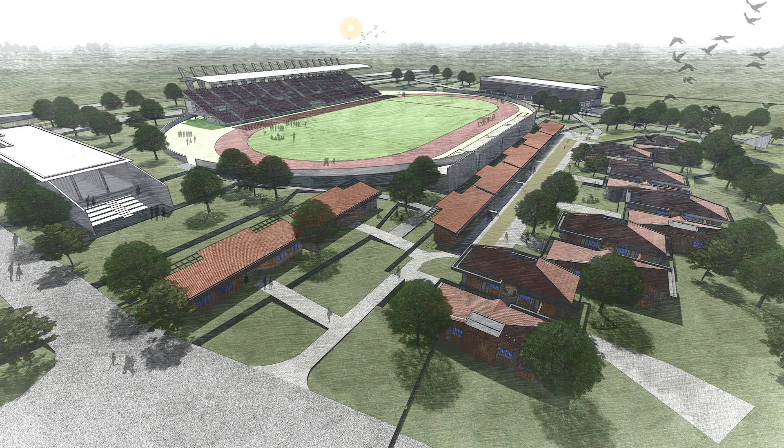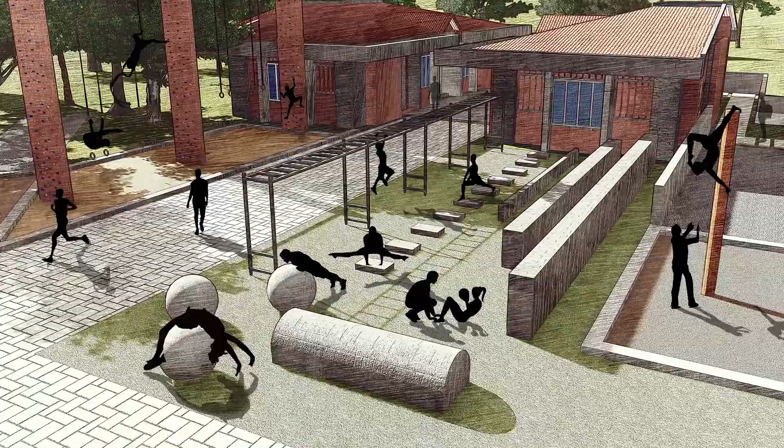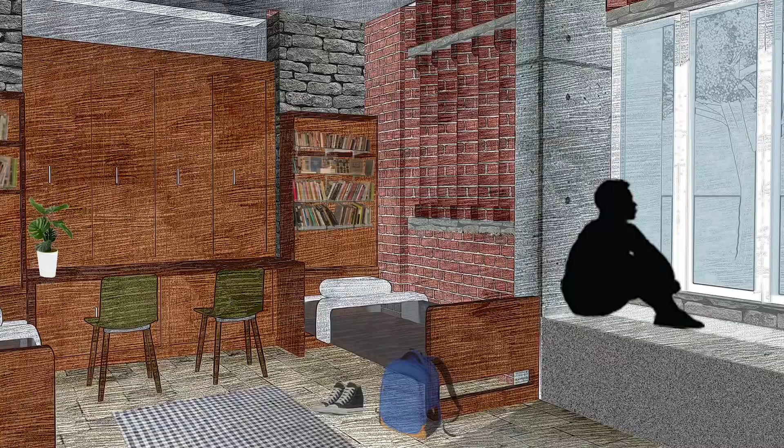Sports Gurukul, the Gurukul for sports, where immature sports talent of India from age group 7 to 15 years will be nurtured in all aspects to become an ideal sportsperson. In the Sports Gurukul, Shishya is under lot of discipline and restrictions, but yet his attitude is with the limitless thinking which is utmost needed to succeed in sports.

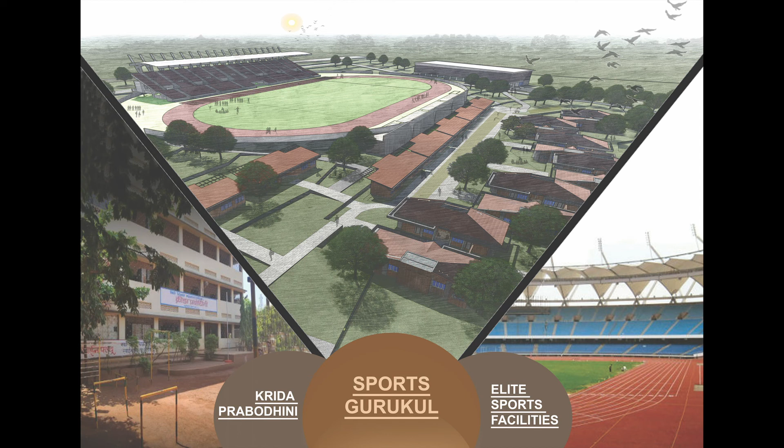Sports Gurukul is the intermediate stage between Krida Prabodhini and other elite sports facilities of the nation like Balewadi. Krida Prabodhini is the initiative by Maharashtra government to shortlist sports talent from remote neighborhoods, educating selected players up to 10th standard and providing sports facilities which are not up to the mark. Here is the time to enhance our grassroots level platform of Indian sports by providing Gurukul environment to young athletes to groom properly. Here is the site for design dissertation.

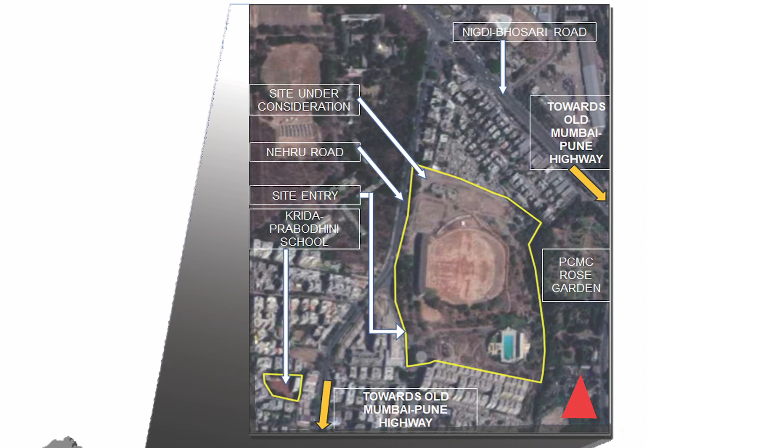Annasaheb Magar Stadium, situated alongside Krida Prabodhini in Pimpri Chinchwad. Site is spread over 25 acres and well connected to other metropolis like Pune, Mumbai and Nashik.

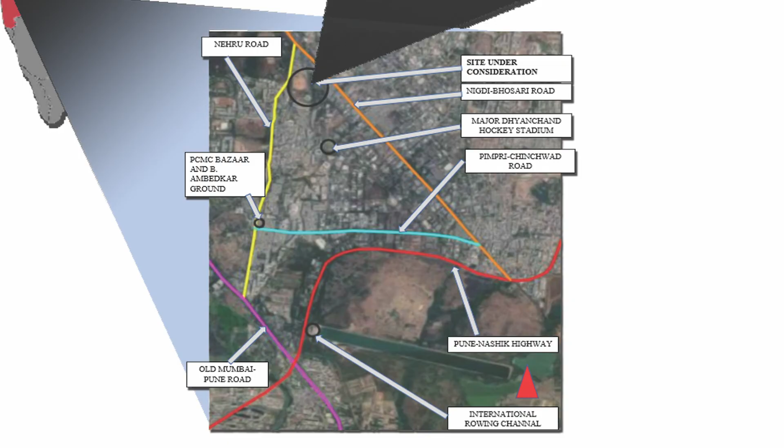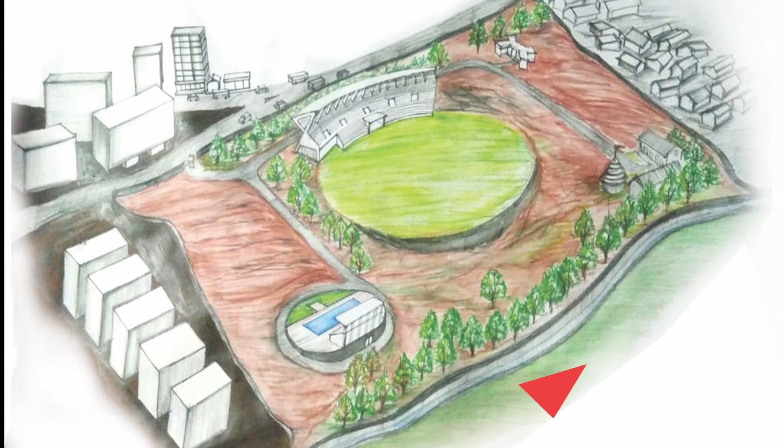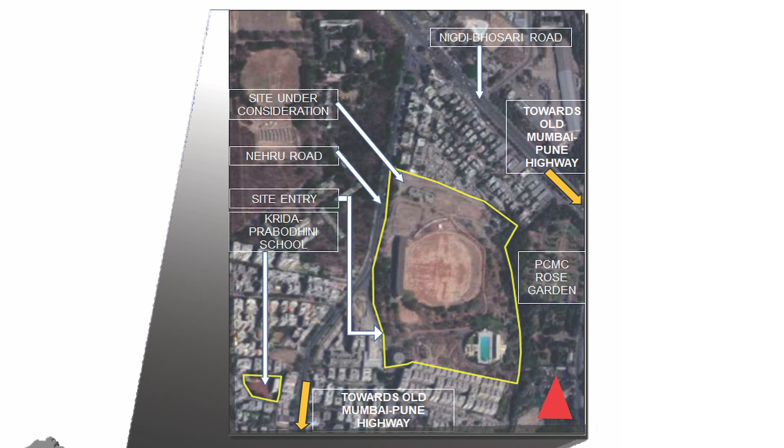Currently on site, there are few existing structures, that is stadium and swimming pool, alongside slightly slopey terrain with barren land. Site is located in the outskirts of metropolis with silent neighborhood and available source of raw sports talent in form of Krida Prabodhini. Current conditions of sports complex and stadium demand sustainable growth of sporting culture like Sports Gurukul.

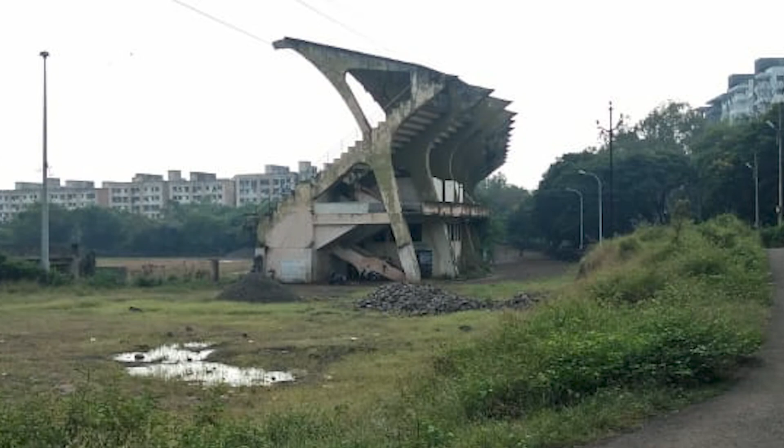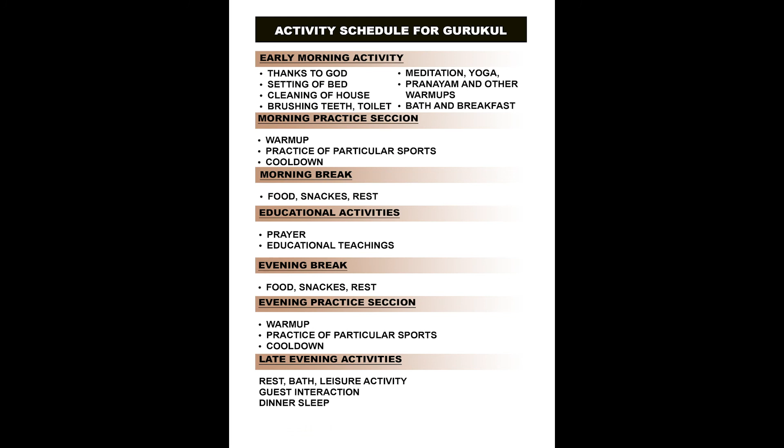Athletics, gymnastics and weightlifting, these sports are included in the Sports Gurukul. After understanding work ethic required for these sports, activity schedule for Sports Gurukul is designed, which ultimately gives rise to design program.

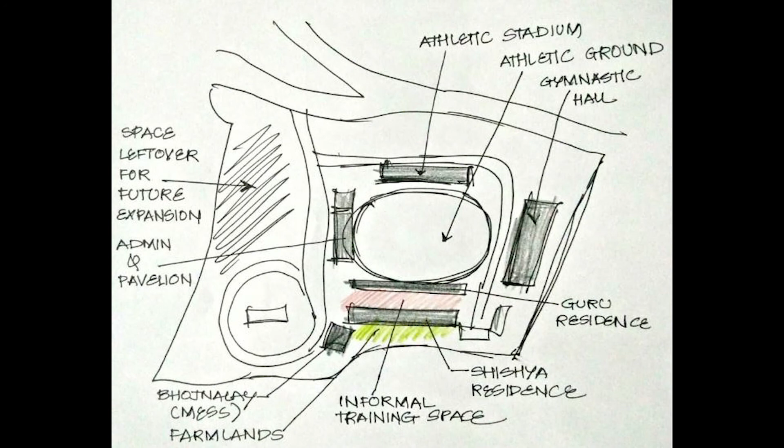By understanding current active public space on site, it helps to differentiate site into three zones: public zone, semi-public and private zone. Build forms are zoned on the site as per the priorities, with space kept left over for future expansion.

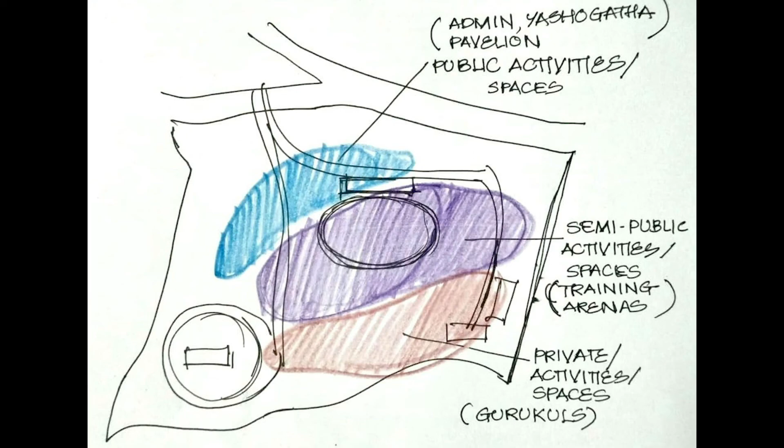Here is the master site plan. As per earlier zoning ideologies, build forms are placed as per the public, semi-public and private zones. First one is public zone. In this, administration department and Yashogatha Pavilion, that is sports museum, is placed.

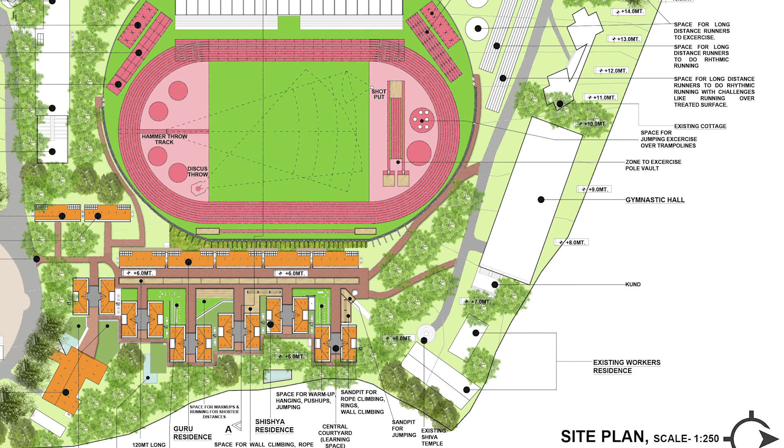Semi-public zone: athletic stadium, athletic ground and gymnastic hall is placed in this zone. Last one is private zone, where Gurukul residence and Bhojnalay is placed.

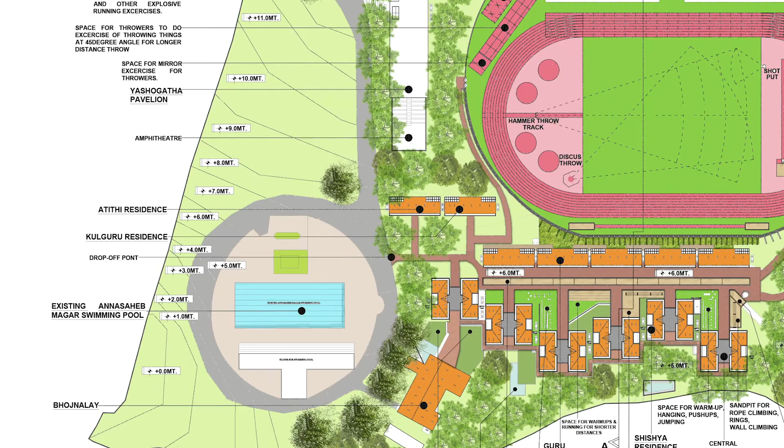At the entrance in front we have a statue of inspiration. Then there is a bifurcation of road, one goes to athletic stadium and another one leads to swimming pool. Land next to the road which leads to swimming pool is kept vacant for future expansion of Sports Gurukul. Swimming pool of the sports complex is working very well, so it is kept untouched.

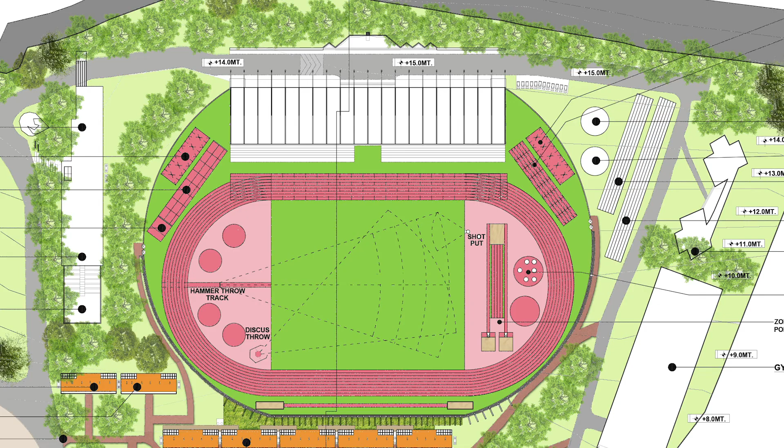At the front of entrance we have a longitudinal building, that is administration department and Yashogatha Pavilion. Then we have an athletic stadium and athletic ground. On the athletic ground there are different zones assigned for different types of athletics.

Here is the zone for throwers like javelin throw, hammer throw, discus throw. Here they can practice for their clear action with 45-degree throw. Here are the circles made for group exercises.

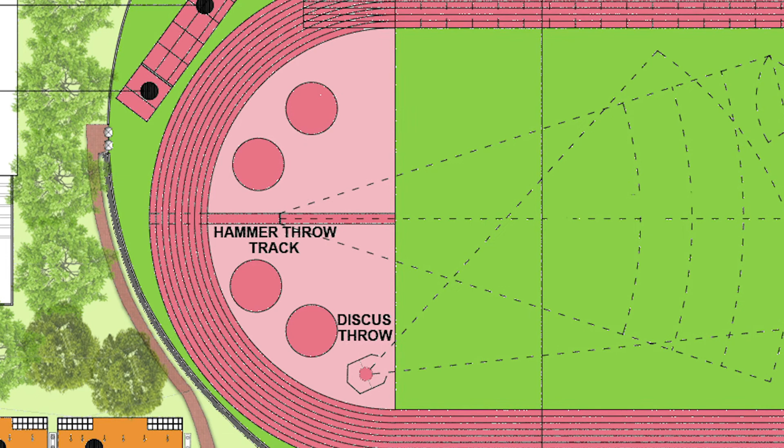Here is the zone for jumpers like long jumpers, triple jumpers, pole vault. Here they also have circles for group exercises. There is one circle assigned for trampoline for getting jumping rhythm.

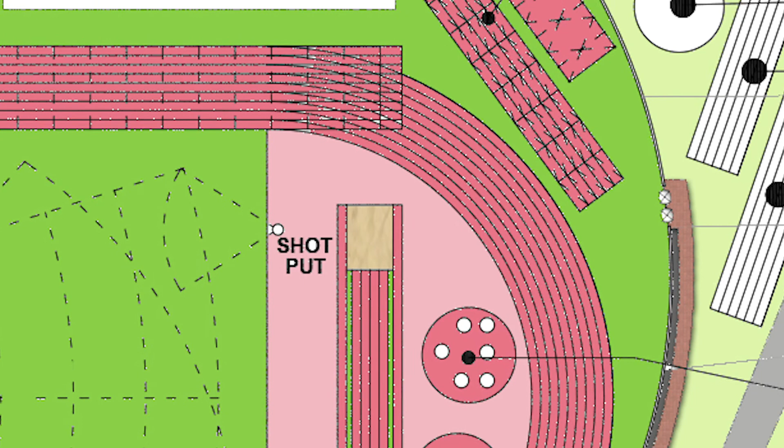Here is the zone for sprinters for their explosive exercises and agility exercises. Outside the stadium there is a zone for long distance runners for their rhythmic running exercises.

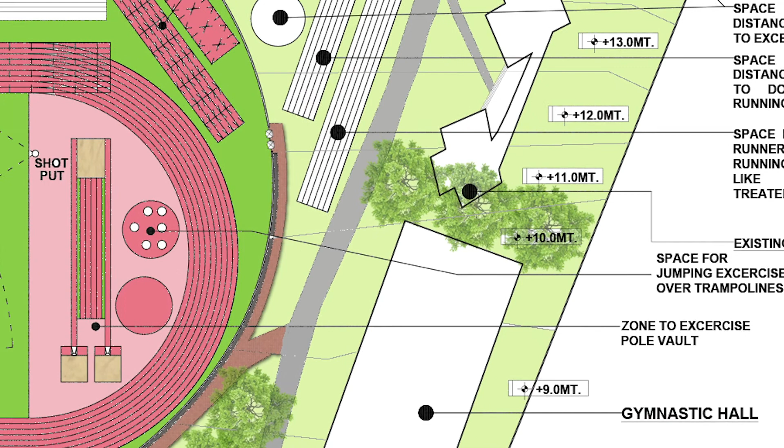These all formal training arenas are connected to Gurukul residences through a pathway which acts as a pause for the athlete to prepare the right mindset before entering the arena, and questions the young mind: Did I give 100% on field? The pathway further leads to informal training space, which inspires the young kid to compete more, train more, and push their limits for one more time.

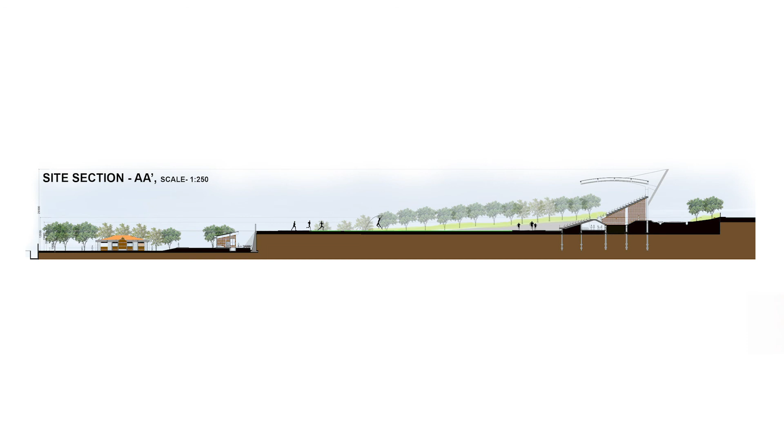Here is the site section. Site is equipped with a minor slope. At the top, there is an athletic stadium, whereas at the bottom we have residences of Gurukul with informal training space.

Here is the Gurukul residences, the heart of the Sports Gurukul: Shishya residence, informal training space, Guru's residence, and athletic ground on top.

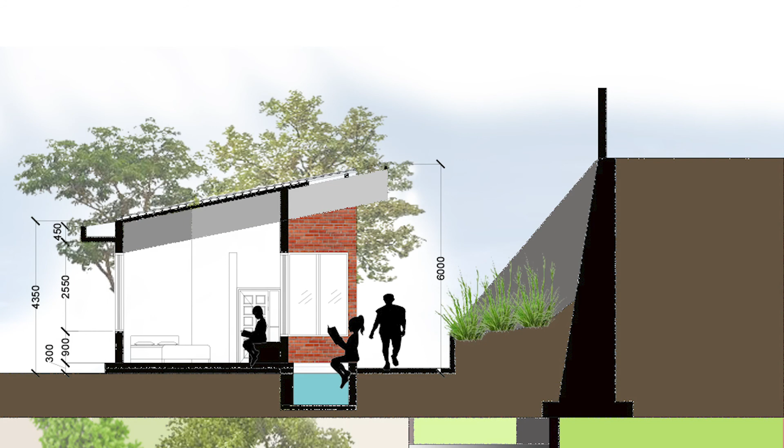Guru's residence with the pool in the backyard. Interior of Guru's residence with the sitting katta and small work desk next to the window.

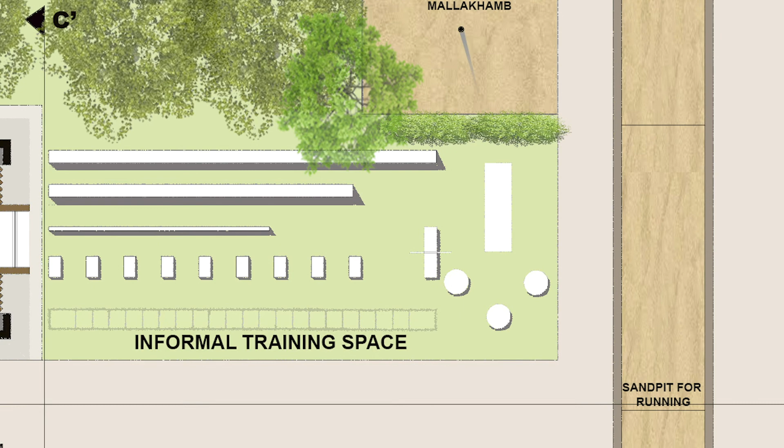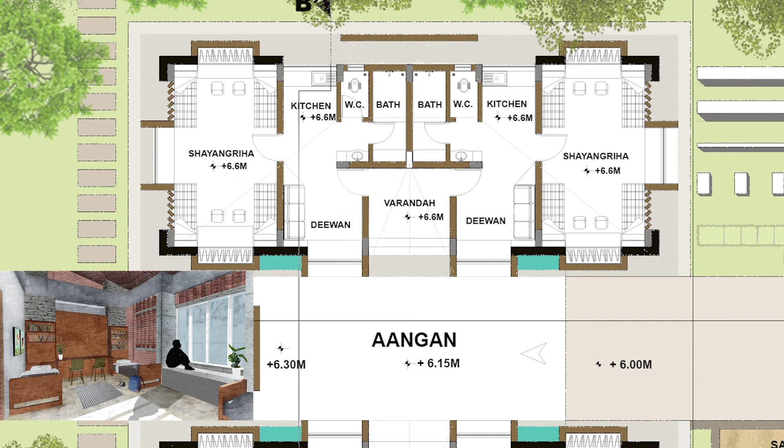Informal training space where athletes can push themselves before and after formal training in arenas. Shishya residence: Aangan, the community space and learning space. Shayangriha, with the interiors of exposed brick jali and stone masonry.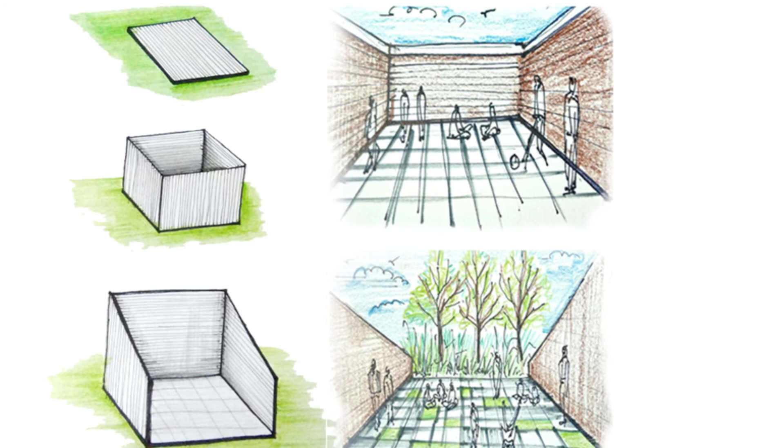Gurukul residence design comes into picture after undergoing different design stages. Here is stage 1. At initial stage, form is developed through opening up the closed interior spaces into exterior to enhance the space quality through nature.

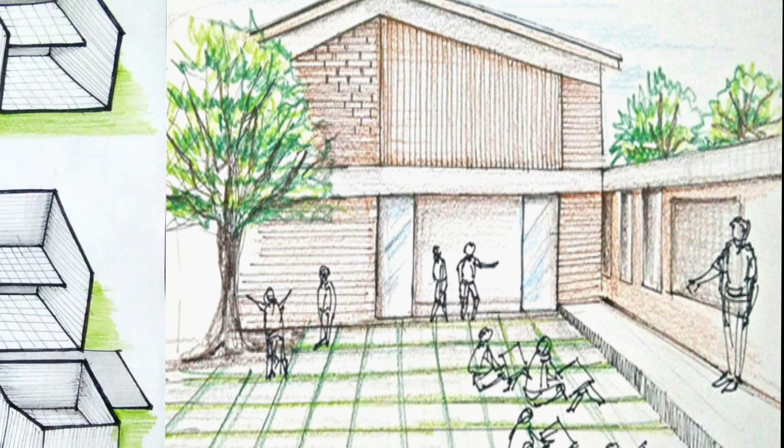Stage 2. In this, floors are stacked one above the another and courtyard is placed between two build forms, which acts as the soul of the structure. Later on, Guru and Shishya's residential units are separated to maintain their privacy.

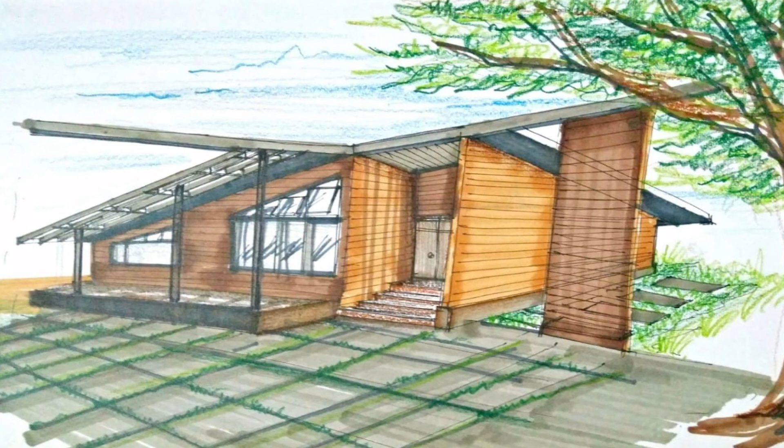Stage 3. At third stage, Shishya's residential units are designed in a more contemporary and holistic way for players of age group from 6 to 16 years. 4 residential units are bound together with one thread, that is the courtyard. Slopy pergolas and extended verandas add gypsy character to the architecture which is essential for young minds.

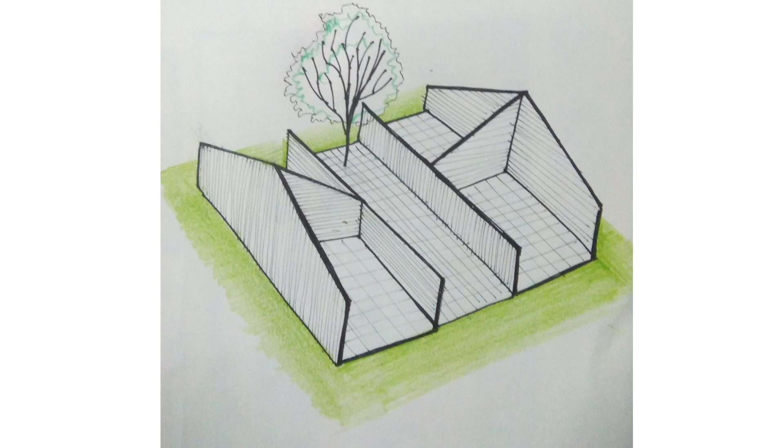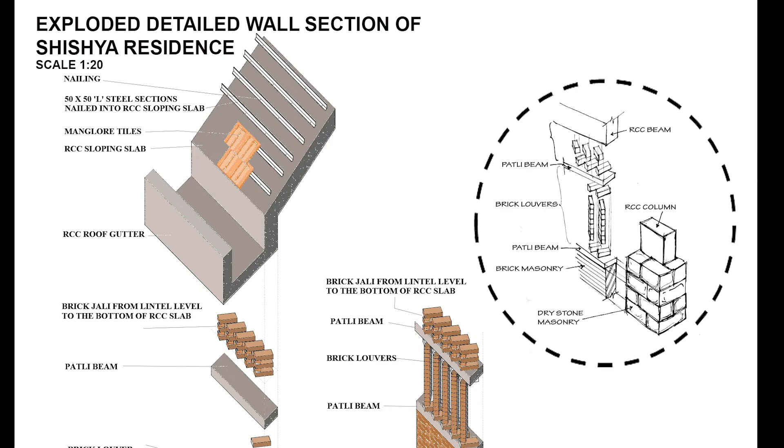Stage 4. In this, adjacent units are joined together to decrease construction cost. Angan, that is courtyard, is well placed which will be under shadow during daytime. On the open side, exposed brick jalis, brick louvers and dry stone masonry is placed to have a glimpse of local Wada architecture and better suitability with hot and dry climate of the site.

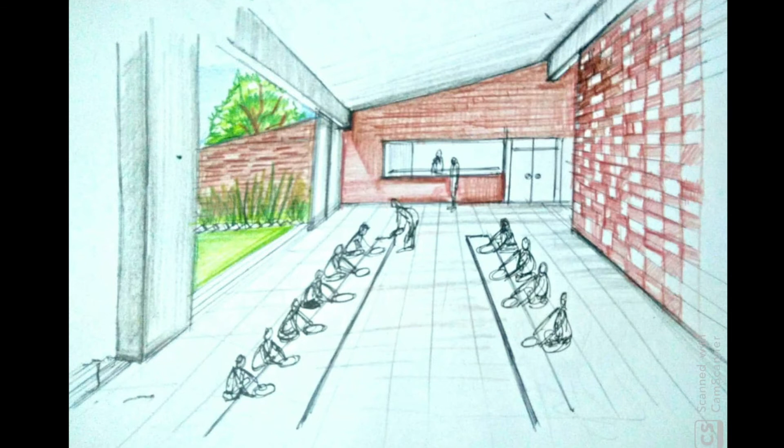Bhojanalaya is the eating space for Gurukul, designed as per Indian rituals of diet, and it is sufficient for all Shishyas to eat food at one time. Exposed brickwork, exposed concrete work and green space around the structure adds aesthetic beauty to the structure.

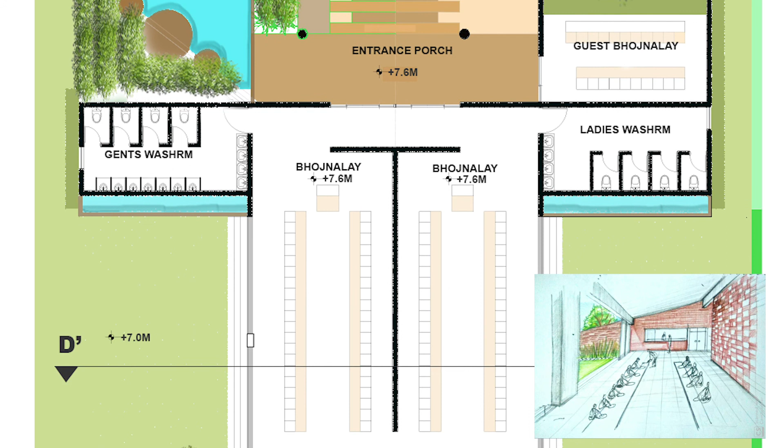Spaces of Bhojanalaya have been designed as per the need of traditional eating rituals of ancient India. Like in Bhojanalaya, meal will be eaten by sitting on the ground. Planning of Bhojanalaya is quite straightforward to cater to a large crowd at once. Kitchen services, utility space and storage have a service entry from the left side.

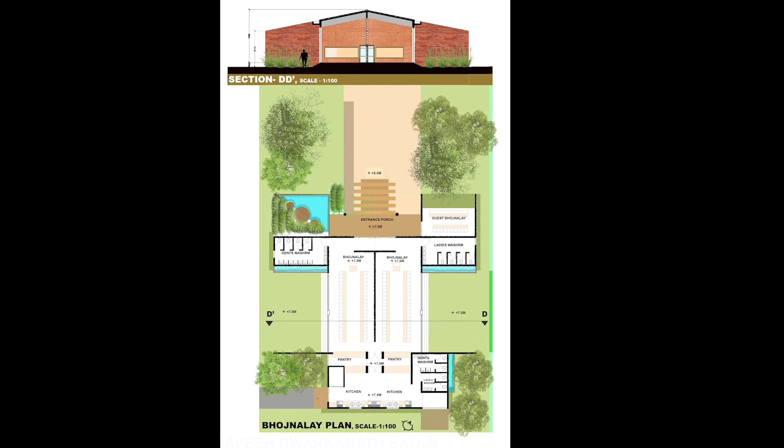Punctured skylights in the pre-stressed slab of the stadium stand and glass facades on the exteriors help to light up the interiors with sunlight as well as provide cross ventilation.

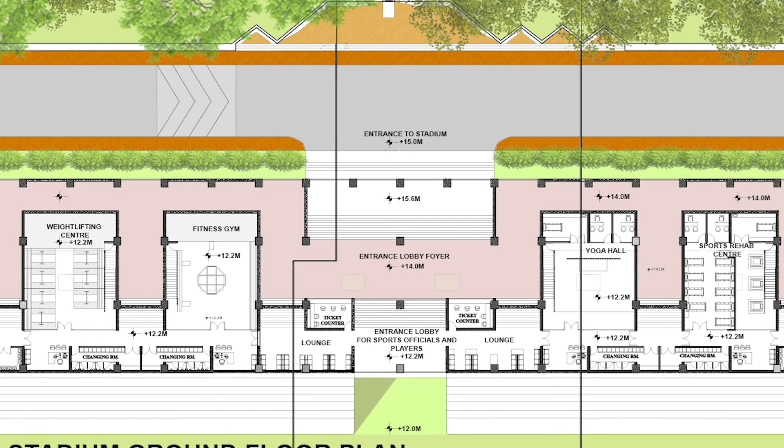Inner planning of the stadium is quite efficient to cater to different categories of people. A grand entrance lobby is placed in the center to hold a large crowd, with many corridors from the stands connected to the entrance lobby from either side.

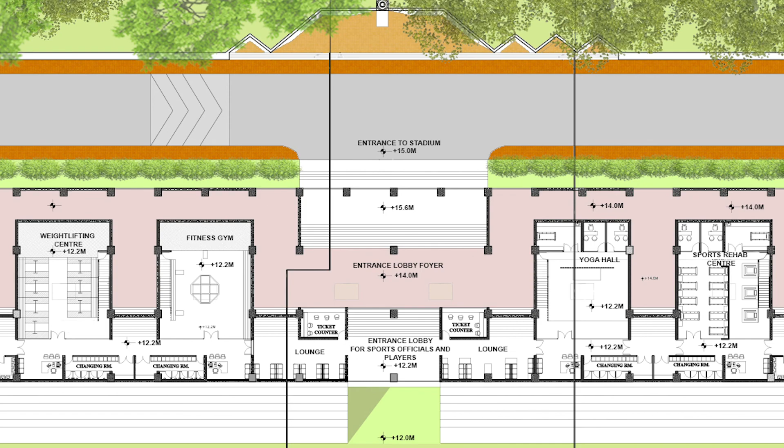Four blocks - weightlifting center, gymnasium, yoga center, and rehab center - are placed with changing rooms in front for the betterment of athletes and users. Big toilets are placed on either side for the spectator crowd.

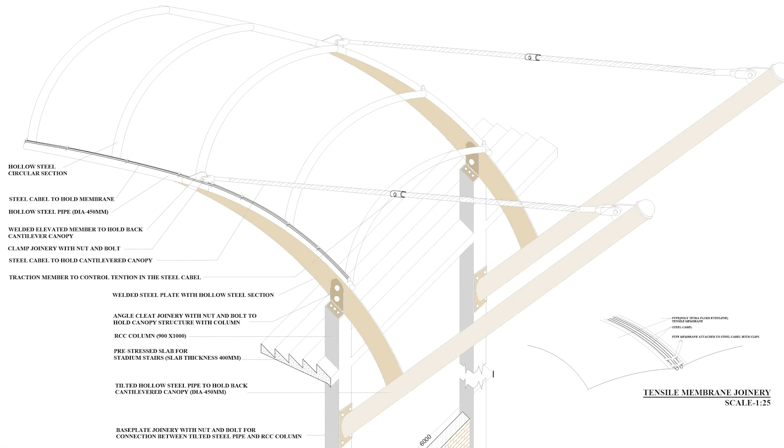Let's get into the details of the athletic stadium. The stadium canopy is a lightweight steel structure with PTFE membrane over it, which spans over the spectator stands, 20 meters in length and 120 meters in width.

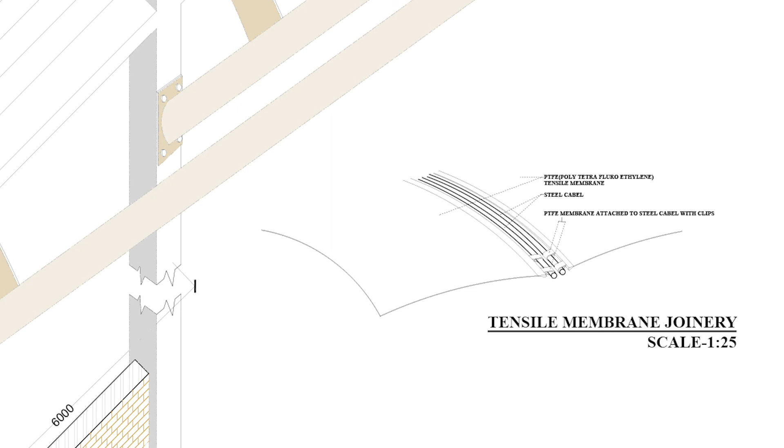PTFE tensile membrane is connected to the canopy through steel cables where they attach with clips. Exterior exposed brick wall with different brick bonds helps to cool the interiors.

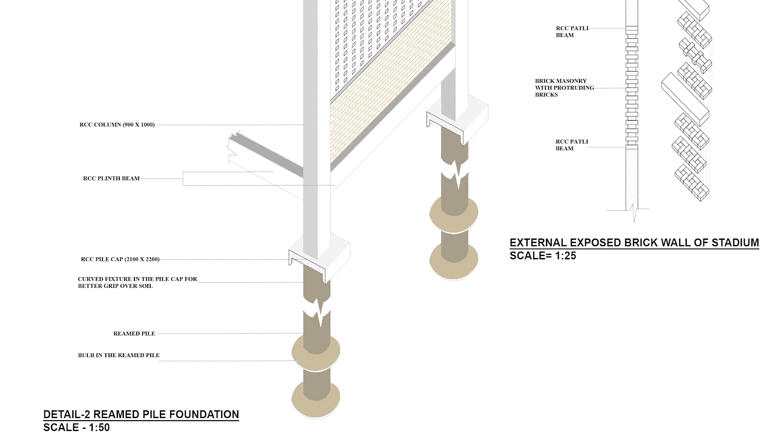Reamed pile foundation is proposed for a megastructure like the athletic stadium to hold its stability over longer years, given the existing black cotton soil which is not good for construction. Let's move on to the underground details of the stadium.

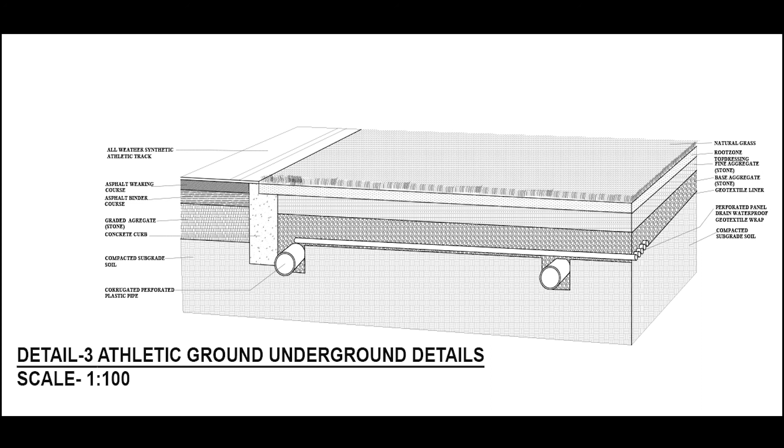Perforated underground pipes laid over the central green pitch collect rainwater for reuse over the period of time, as the site is in the hot and dry climate of Pune where water scarcity is observed in the dry season of the year. Let's move on to the guardians of the stadium.

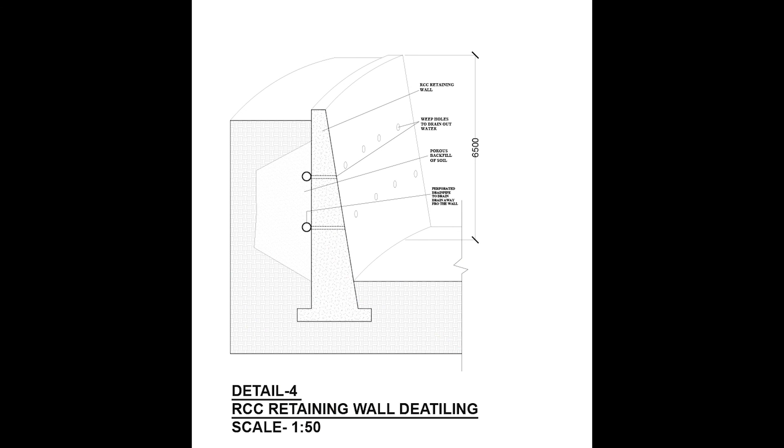The athletic arena is carved from the existing site which gives itself a bowl shape on one side. An RCC retaining wall helps in resisting the existing terrain and soil.

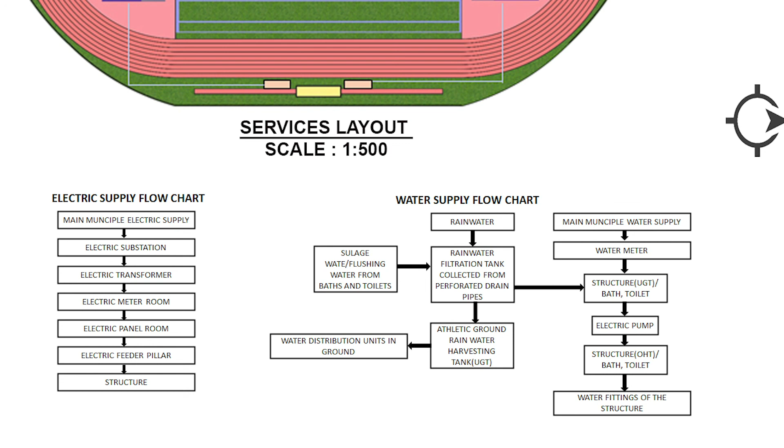Let's move towards the one who brings sustainable character to the arena. There is always concern expressed over the use of potable water for sporting arenas. To cater to the big need of stadia like 10,000 liters of water per day, we propose to use harvested water from monsoon, filter it, and reuse it again and again over the year.

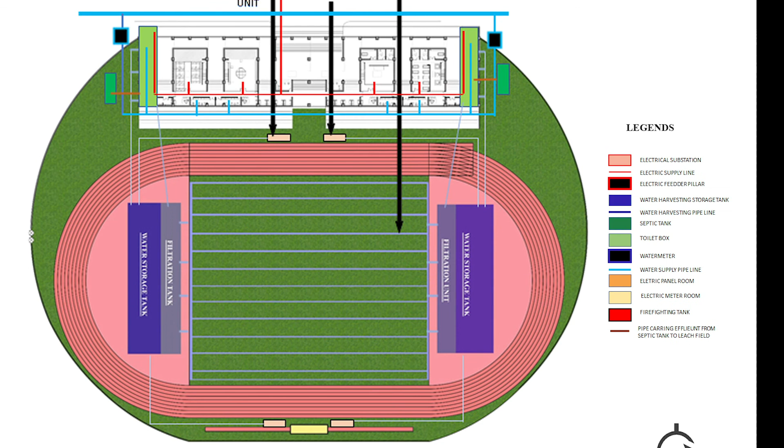Monsoon water will be collected through corrugated drain pipes installed under the grass field. Collected water will be sent to a filtration tank, and after it gets filtered, it will be sent to a storage tank. Stored water will be used as per the needs.

Storage tank is connected to the water distribution unit which is next to the field. By connecting sprinkler accessories, water can be fed to the field. Stored water can also be used for the toilets in the stadium stand.

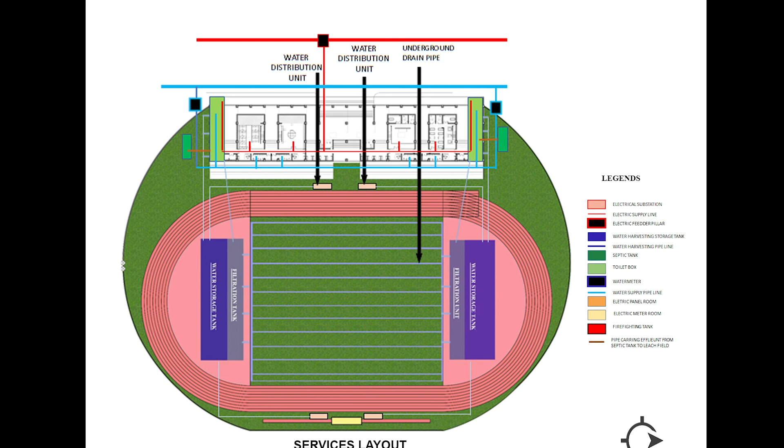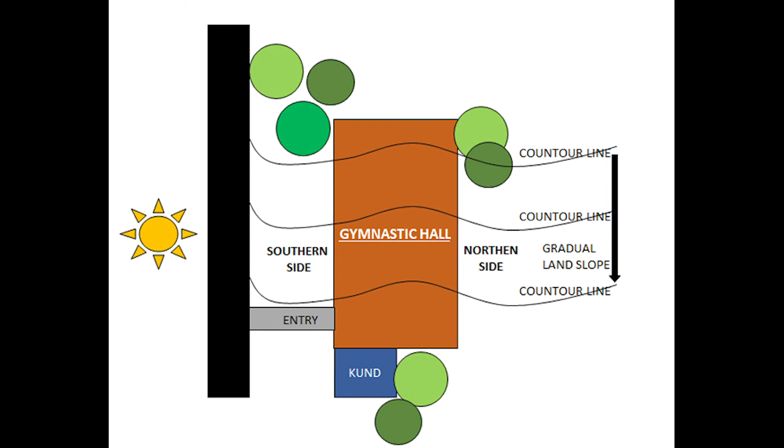Gymnastic hall is the place for young gymnasts to perform various types of gymnastics. Gymnastic hall is linear and rectangular, placed longitudinally in the east-west direction so long facades will face the northern and southern sides for natural light.

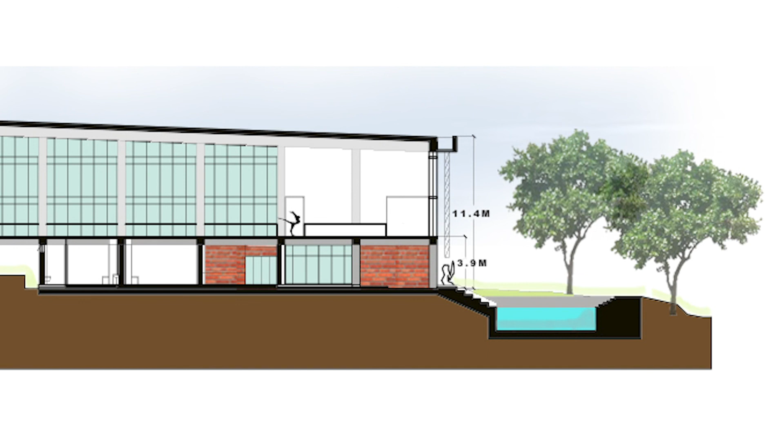Gymnastic hall is a stilted structure over the existing contours. A slight slope to the roof helps to collect rainwater in the RCC gutter, from where water will be spilled over the murals through a water chain like a shower. Then that water will end up in the kund.

On the ground floor, changing rooms for athletes with a small pool for recovery are placed, from where one can lead to the upper floor through a ramp or through a staircase.

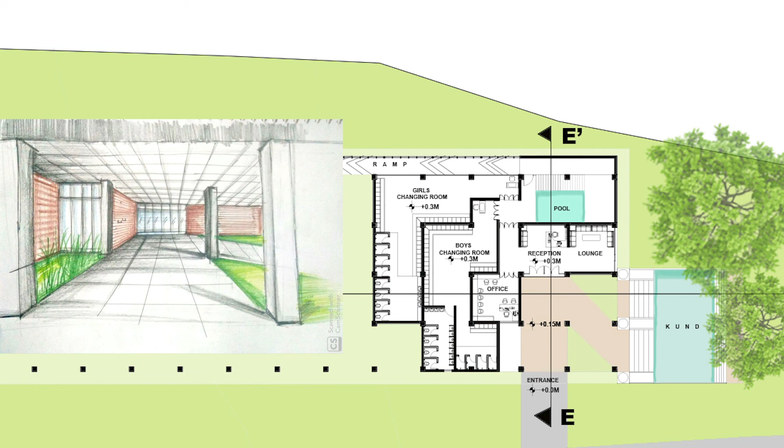Surrounding landscapes of the structure add beauty to the contemporary look of exposed brick and exposed concrete from the point of entrance itself. On the first floor, different regimes of gymnastics can be practiced in the gymnastic hall. Adequate space has been left for warm-up and training for beginners.

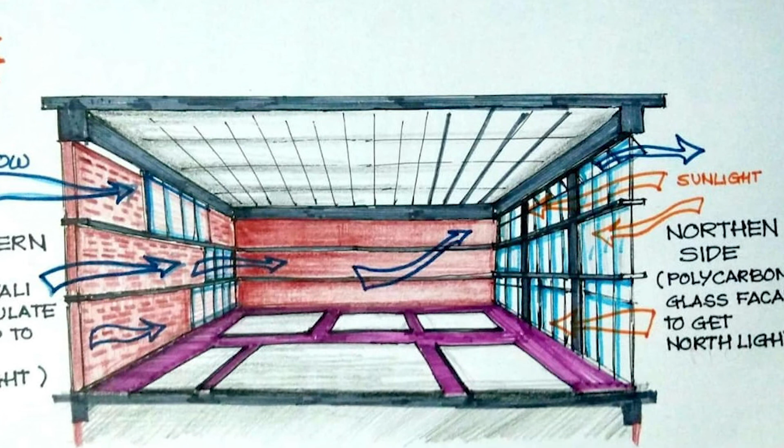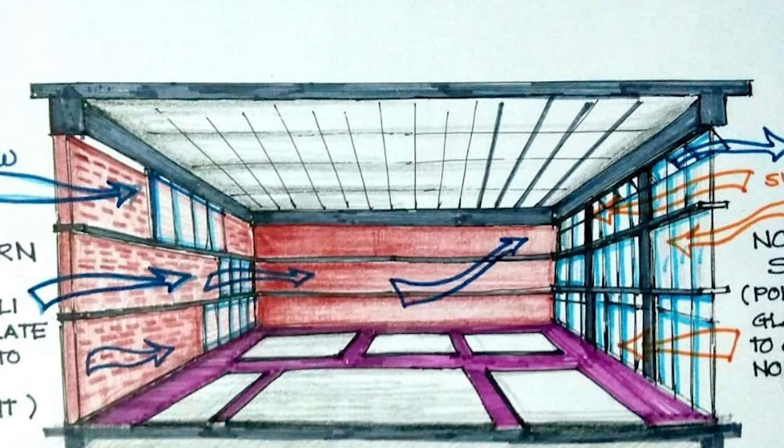In lateral section, the northern side is filled with polycarbonate glass facade to collect diffuse north light, whereas on the southern side, brick jalis are used intelligently to cut sunlight and circulate air.

South facade of the gymnastic hall is treated smartly to avoid shadow patterns in the interiors which disturb the gymnast while performing, and it helps cool the interiors with better air circulation. Small aluminum grills are placed on the open sides to avoid invading birds.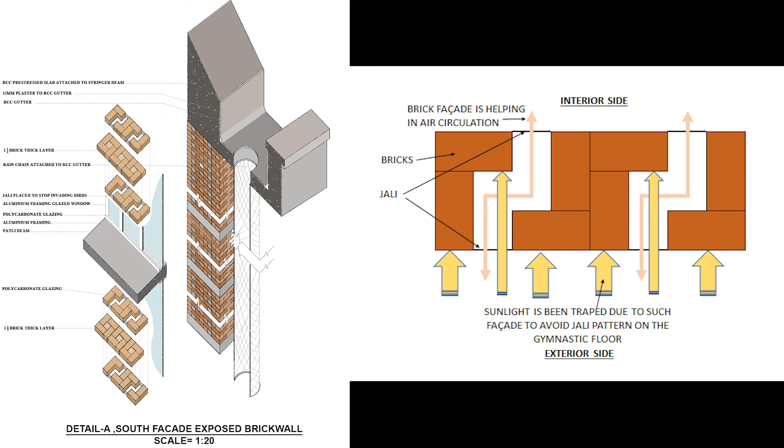At the entrance, there is a bifurcation of the road where a statue of inspiration is placed, which boosts the adrenaline of anyone who enters the complex.

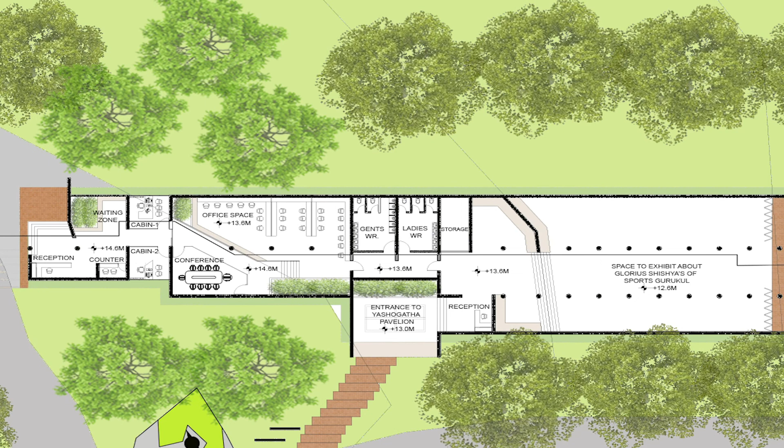Administration and Yashogatha Pavilion are combined together with different entrances through the gateway of neighborhood trees which are welcoming to visitors. Here, the spaces are aligned as per the chronology.

Planning of the administration and pavilion building is much linear, and spaces flow as per the flow of the site contours. Exposed brickwork, brick jalis, and exposed concrete are used to give an earthy look to the structure.

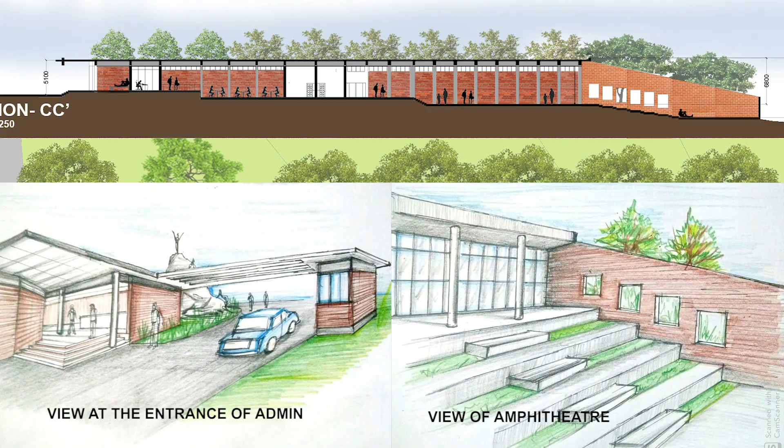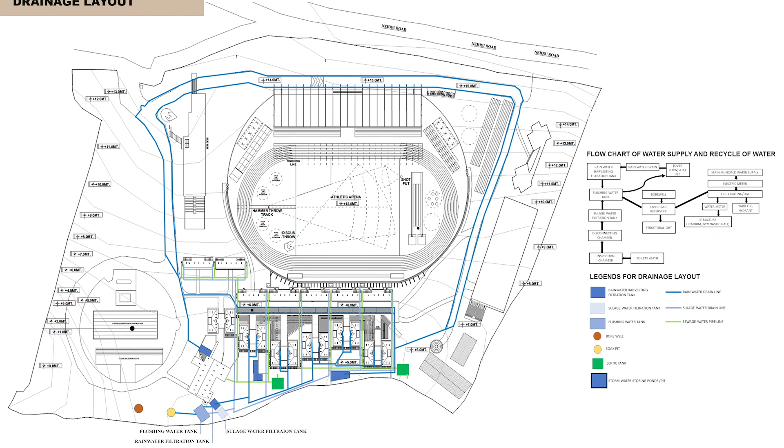Drainage layout: here, storm water and sewage water is filtered and reused to decrease water dependency on municipal water supply. Water supply layout: here, municipal water supply is combined with treated flushing water and borewell water to tackle water scarcity in the dry season.